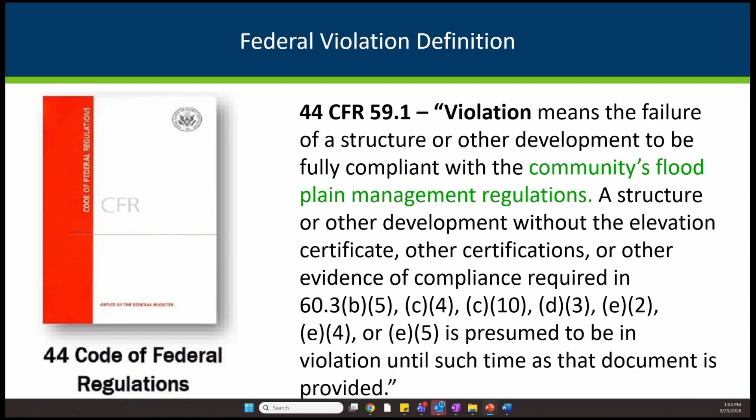And a reminder that sometimes folks think, well, as long as they're meeting the FEMA requirements, it's okay. But FEMA reminds us that communities, if they have higher standards, more restrictive standards, they are expected to enforce those rules that are in their ordinance. Your ordinance is the law in your community.

And there is wording in the Code of Federal Regulations here that if there are higher standards adopted by the state, and Minnesota has many higher standards, or your community, if you adopt things that are higher standards than our state minimums, whichever's more restrictive is what takes precedence. And that's, again, in the federal code. And there's another part in the federal code, I don't have that quoted here, but that the higher standards are encouraged in the federal standard.

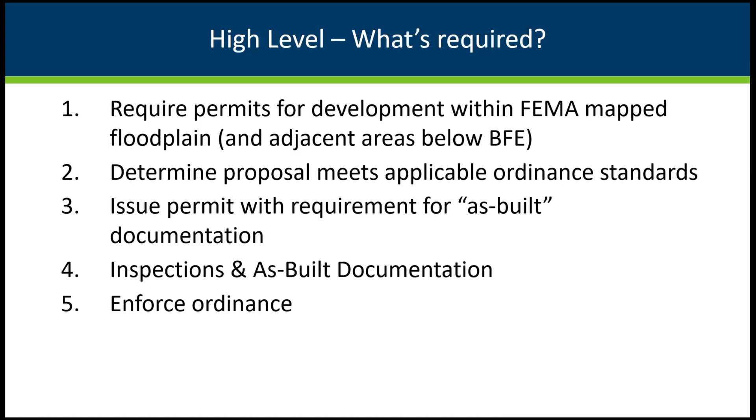So high level, what is required? That you're going to require permits for development in the FEMA mapped floodplain and in adjacent areas that are below the base flood elevation, the 100-year floodplain. You're going to determine whether that proposal meets your ordinance standards. You're going to issue a permit with a requirement that as-built documentation is submitted. You'll do appropriate inspections and get that as-built documentation, and you'll enforce your ordinance. And that's part of what communities agreed to when they get enrolled in the National Flood Insurance Program.

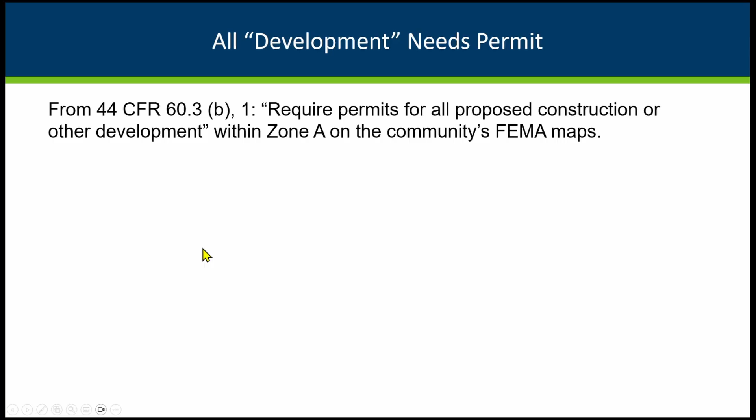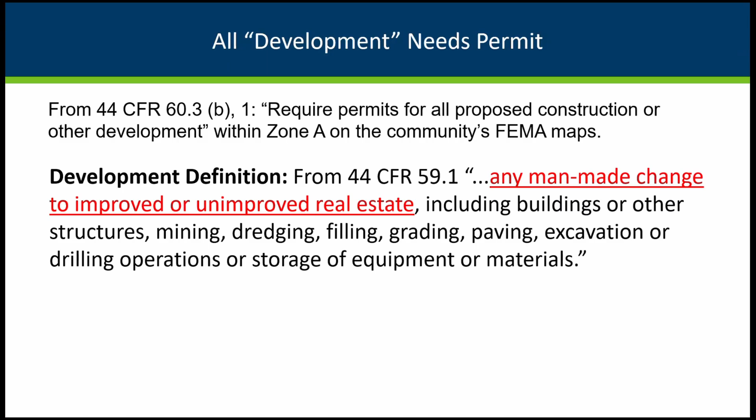So what development needs a permit? That, again, comes right from the federal code. It says that we must require permits for all proposed construction or other development within the Zone A. So any of the 1% annual chance floodplains or the 100-year floodplain. And the definition of development is very broad. It goes beyond buildings and main roadway crossings and those kinds of things. It's any man-made change to the improved or unimproved real estate. So in addition to buildings, that includes other types of structures, mining, dredging, filling, grading, paving, all kinds of different things. Basically any change to the cross section in that floodplain.

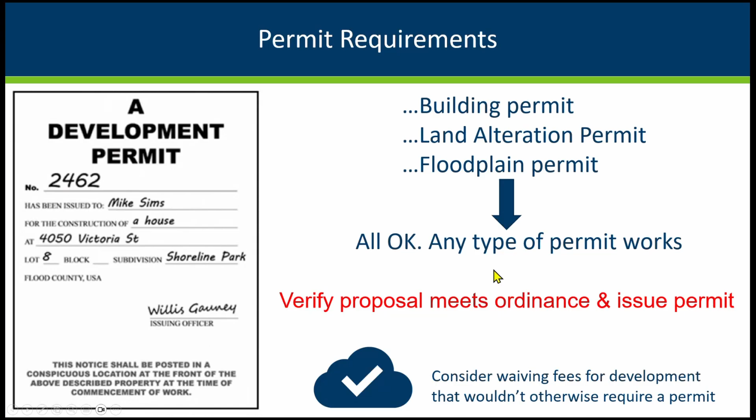And when we talk about permits, if it's a building and you have building code, then you're going to issue a building permit. But if it's not something where you would issue a building permit, you might call it a zoning permit or land alteration permit or floodplain permit, and any of those work. One thing that some communities might do is consider waiving fees or having reduced fees if it's something that wouldn't have required a permit normally. After they submit that permit application, you're going to verify that proposal meets the ordinance, and then you're going to issue that permit. And we do need to require as-built documentation.

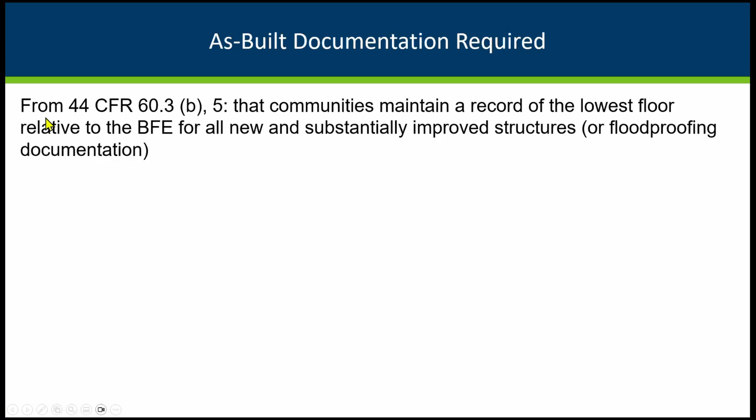And here's the reference in the federal code where it says that communities must maintain a record of that lowest floor and any flood proofing. So that's in federal code, and they emphasize in their trainings that those records must be retained indefinitely. We basically say, as long as that building exists, you should be keeping that on file. And unfortunately, we have come across communities where they cleaned house, they got rid of anything that was older than 5 years.

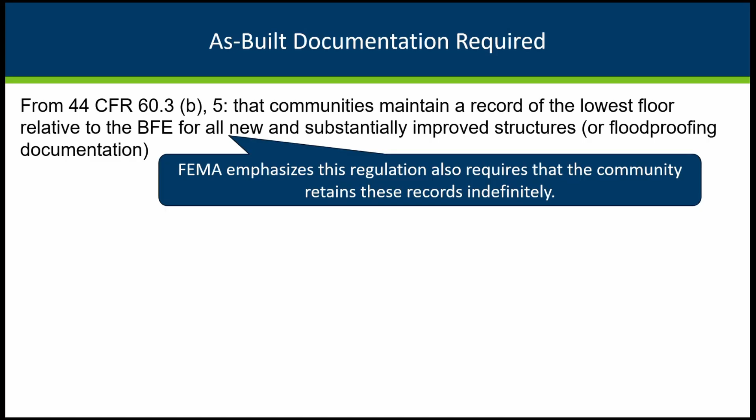And you do need to hang on to these things. Our buildings last for 50, 60, 70, even 100 years. So we want to retain those records. In the state rules, we have similar language that you must have that documentation.

But we'll mention later that there are times when if they're applying for a way to get their FEMA zone changed, or if they need an official FEMA elevation certificate, then they do have to have it signed by that licensed land surveyor or the professional engineer. And our more flexible wording that's in state law won't work in those situations.

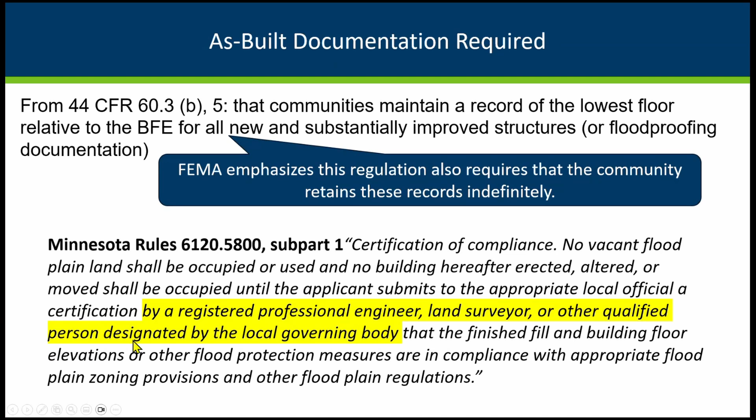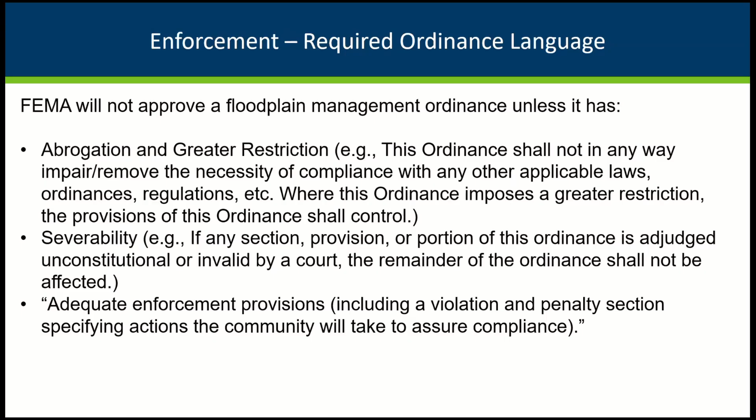We've got the wording in our model ordinance, and when we provide the sample ordinances, we have that included in what communities are adopting. They also want to make sure that you do have the enforcement provisions in your ordinance. And again, we'll have that in our sample ordinance, but sometimes communities, when they are just picking parts of the model and trying to insert it into their existing ordinance, those are things we have to make sure are in there, particularly when you're not adopting our whole model ordinance.

The ordinance in Minnesota law has to be properly adopted. DNR is required to review and give you final approval and verify that your ordinance meets state and federal requirements. But in order to properly adopt, we've got these rules in Minnesota statutes that you need to have at least a 10-day notice in your local newspaper, and at the same time you're sending that notice to DNR and many others. We do prefer it be sent electronically. The language in old ordinances will say you send it to the commissioner, and we prefer it not be mailed to our DNR commissioner or even to us, because that does delay things.

Our state requires that we have our public hearing, and DNR tries to give conditional approval before you have that public hearing. We like to get your draft ordinance so we can do the review and make sure that any required language gets in there before your hearing. Then you have your adoption. We'll be looking for that notice in the paper afterwards. You're required by statute to either run the whole ordinance in the paper, or do a summary notice, and usually communities prefer the summary because it's cheaper. Then DNR gives the final approval and we share it with FEMA, and they do a separate review.

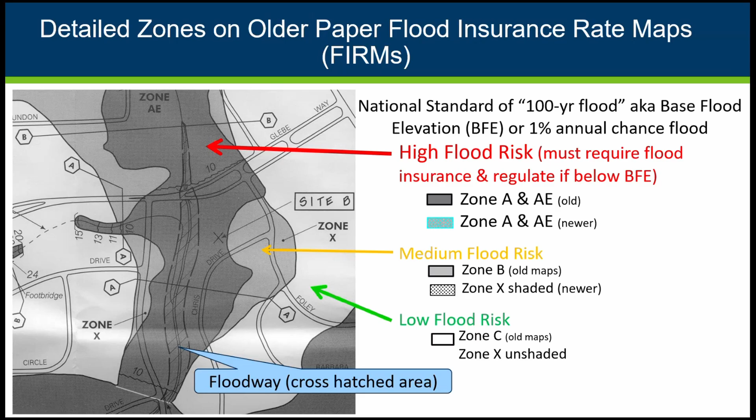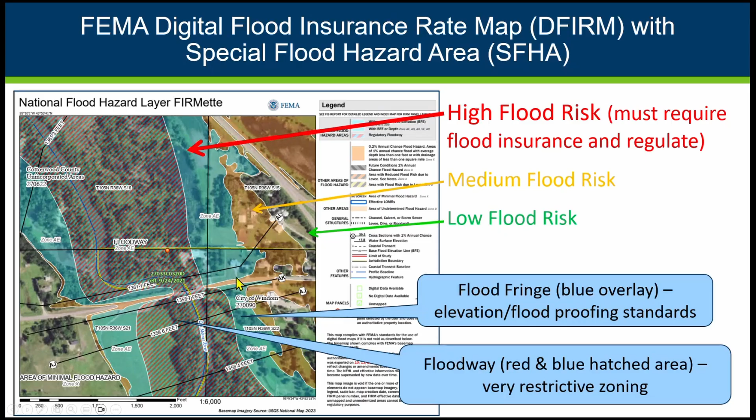There's that flood fringe label. On the newer maps, this is the coloring you'll see: the floodway, that red and blue hatching, and the light blue for the flood fringe. That medium risk area, which is usually the 500-year, will be this orangish brown color. And again, we regulate the floodway much more stringently, and the flood fringe will have our standards that we talk about.

When there is a detailed study, FEMA will have calculated other frequencies. They may have calculated the 10-year, the 50-year, 100-year, and 500-year, or in newer counties, they're also calculating the 25-year and something called the 100-year plus. Our minimum regulated area is that 100-year or the 1% annual chance floodplain. And again, some communities do regulate in the 500-year. And based on what we're hearing about possible future regulations, it appears that we'd be looking at regulating within the 500-year floodplain if that is mapped.

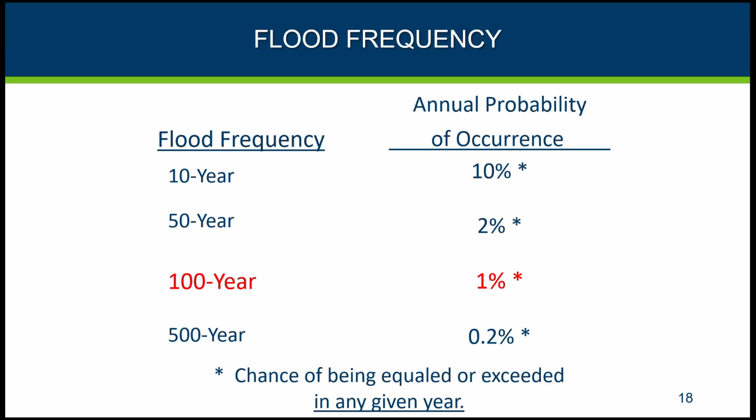If you've heard our presentations on the ASCE 24-24, that's a document that the building code folks use, and we're being encouraged to get the word out about it and encourage communities to adopt some higher standards based on that ASCE 24-24. And we did have a separate presentation about that in one of our monthly LGU forums, and we do have that recording available on our website.

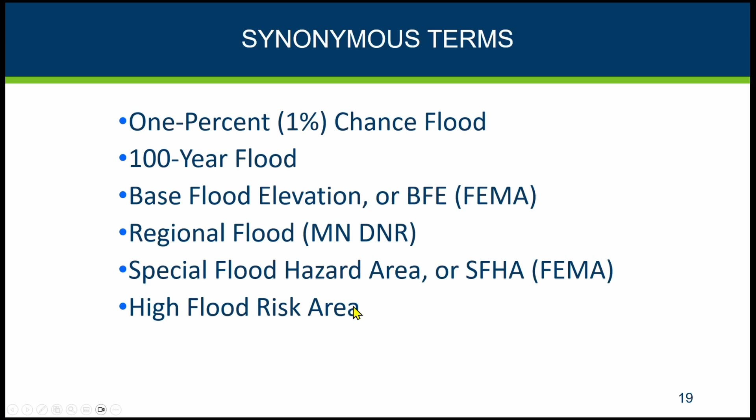The terminology that we're using, and I've already been using a lot of these terms: that 1% annual chance flood, the 100-year flood, base flood elevation is something FEMA will use when we're talking about minimum requirements. In state law, we refer to the regional flood. And if we're talking with insurance agents or lenders, they'll be calling it the special flood hazard area. And basically, these all mean the same thing, that 100-year floodplain, or that high flood risk area that we're regulating.

FEMA requires that any of the FEMA mapped areas are regulated by your ordinance. The way your ordinance is set up, it says this ordinance applies to all these mapped areas. And then we also have some state law that says the area adjacent to the FEMA mapped areas, if it's below the flood elevation, is also regulated by your ordinance. So for instance, this site here, we can see from the elevation contours, is actually a high site. So officially you're still regulating that because it's in the FEMA mapped area. But in this example, they could still put a basement and be meeting minimum elevations because they're so high.

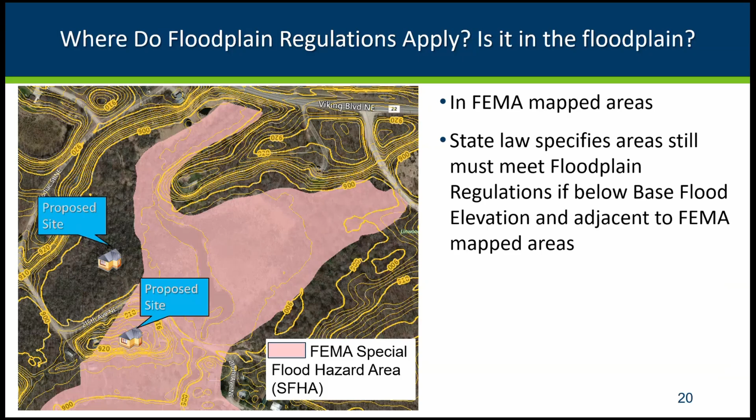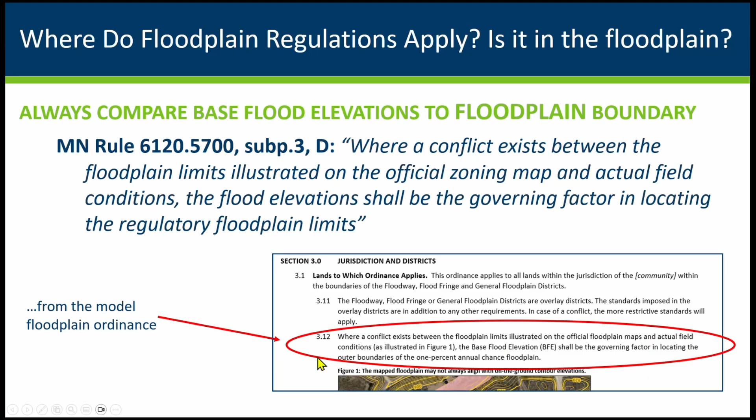But our state law recognized that, like in this example, the FEMA boundaries were not perfect. And many of our counties, unfortunately, still do have floodplain boundaries that do not match the actual ground elevations very well. Over time, this won't be a big deal because our floodplain boundaries will be following the contours better. But for now, keep that in mind if you're in one of those counties. And the language in our sample ordinance is here in section 3, and it talks about where there's that conflict, that you will regulate that area that's below the base flood elevation adjacent to the mapped floodplain.

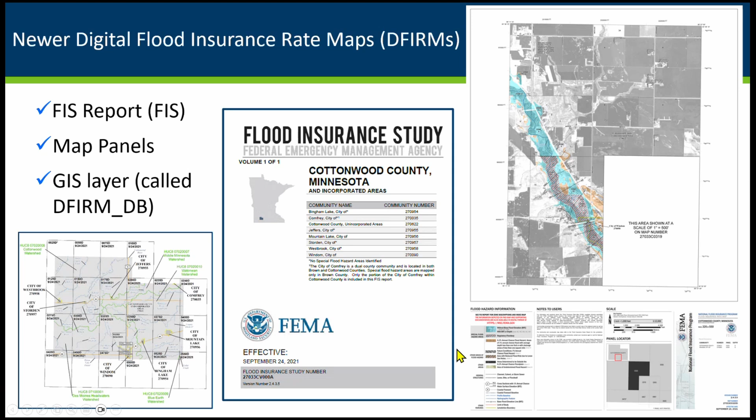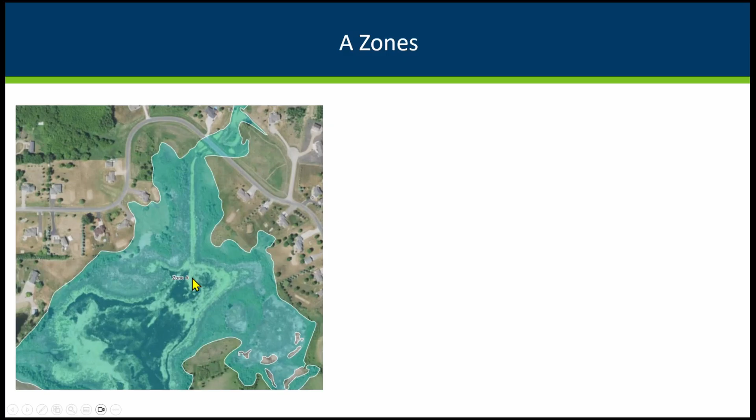The newer ones will have a color digital background or aerial photo background. Some of the first earlier new ones had more of a black and white aerial background. And those were showing some of the detailed study areas, but much of the state, we don't have detailed studies. We have zone A, where it's showing that 100-year floodplain, that 1% annual chance floodplain, but there's no elevations on the FEMA maps.

We do have supporting mapping, modeling, and we've got our cross sections in our DNR viewer, our lake and flood elevations online. And then we do have the 1% elevations on those lines. So we figured out which district it's in. Either it's going to be the floodway district, the flood fringe district, if it's detailed study, or in your ordinance, we referred to the areas with A zones as the general floodplain. That's also the district in some cases that will have detailed studies that don't have a floodway identified, and you'll be looking in your general floodplain area in your ordinance.

You're going to look at your ordinance, see what standards apply for the proposal that they've got, and do the review. And we do have two forms of a possible application form. You don't have to use this, but we do make this available as a Word document. So you can either use the full version that we've got as a recommended permit application, or you can put your name on it and take the parts that are helpful for your community and add what other local requirements you have. But we do have links to both versions. This is the simplified version that you would use if they're doing maybe decks or fences or tanks or just earth moving of some kind. And then we do have the building version that gets into more details that you need to look at if they're putting in a building.

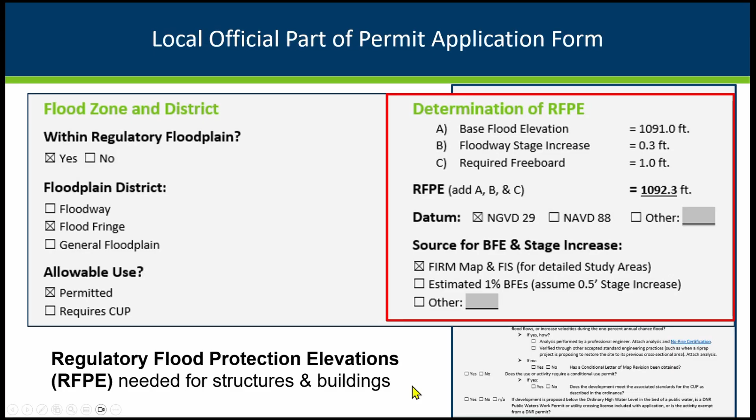And if you've got older maps, it's going to be in the NGVD 29 datum. If you've got newer maps, the information will be in the newer NAVD 1988 datum. Sometimes you have local datum. So it's important that you're noting what datum you're working in, especially if you're up in the northwest part of the state where that can be over a foot different. And a place to note, where did you get the information from? Was it from that flood insurance rate map and the flood insurance study? Was it based on maybe our supporting 1% annual chance flood cross sections that we have on our lake and flood elevations online site, or some other source, like maybe you reached out to DNR or got a Corps of Engineers study or something like that? But we especially need to know that flood protection elevation for structures and buildings, knowing that minimum floor elevation and how high floodproofing needs to go if it's something that can be floodproofed.

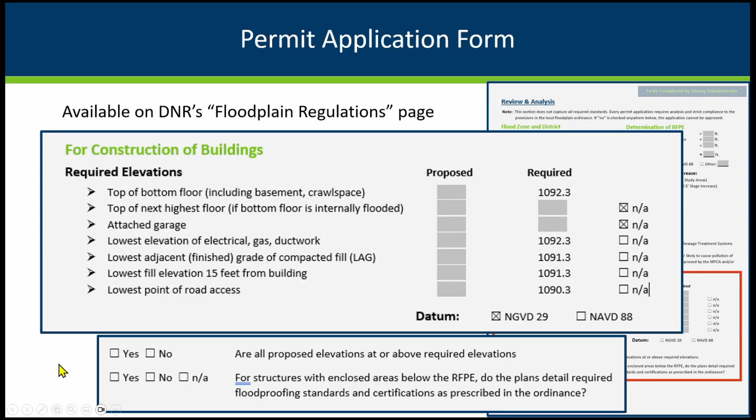Again, on that sample form that we've got on our website, we have a place to note what are the required elevations according to your ordinance, and then look at what are they proposing. And again, making sure that you're talking apples and apples, that if you've got the requirements here in 29 datum, make sure that you're looking at what the 29 datum would be for what your proposed elevations are. And we've also got a spot to note, are they all at or above the required elevations, yes or no? Or if it's something that you're looking at floodproofing, is it showing that the floodproofing is occurring in the area it needs to? So we're trying to step through making sure that their application is meeting your ordinance. Trying to avoid problems from the beginning is the best way to be enforcing your ordinance and making sure that they're following the rules.

We do allow those small accessory structures to be wet flood proofed. And in our most recent sample ordinance, we say that's up to 600 square feet, because FEMA came out with some accessory and ag structure guidance a few years ago and said that we can use up to 600 square feet.

Our older model ordinance and many of your ordinances use 576 square feet, a 24 by 24 building. Or if you have a really old ordinance, you might just have 500 square feet in there. But that allows flood-resistant materials, elevated utilities. It's got to be properly anchored, and it does require the flood openings that are within a foot of the ground.

Ceil, if I can interrupt, we did have a question in the chat if we have time. They're basically just asking about roads and sidewalks, whether or not they need to be elevated to the base flood elevation. Sure. Roads and sidewalks. Well, sidewalks, we don't have anything that specifically talks about that. The roads gets a little more complicated because it depends on if it's a major road.

We've got wording in our subdivision language and in the public utilities and road section of the ordinance, like a main highway, a main collector road. It does need to be elevated. Let's see, help me remember, Gary. I believe it's to the RFPE. For major transportation routes.

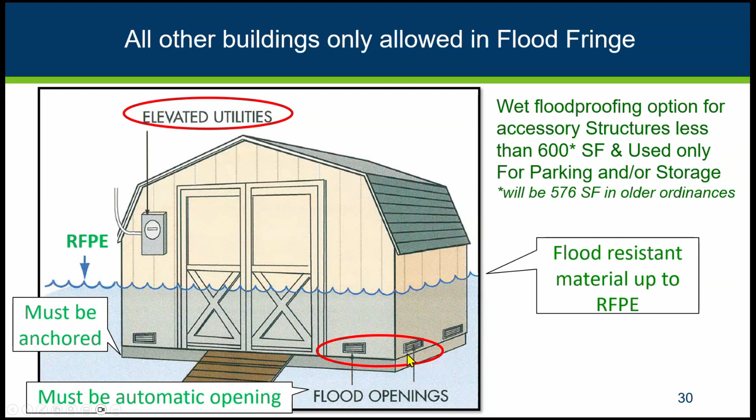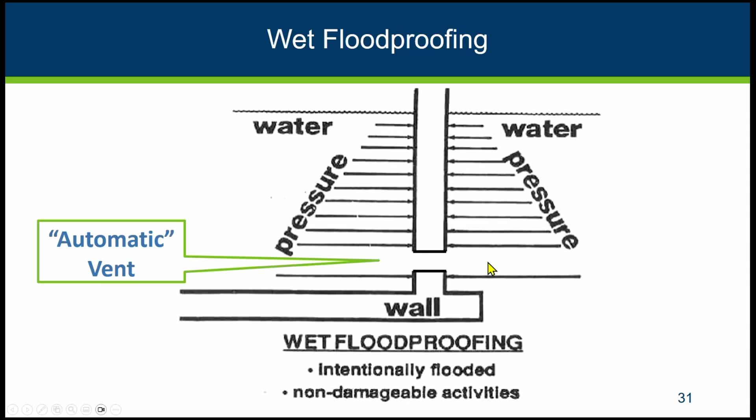Oh, back to this, talking about these flood openings. And the requirement is that those are no more than a foot above the ground or a foot above the floor of the building. And the idea there is to allow the equalizing of the water so that you don't get water building up on the outside of a wall, that if you have the opening, then the pressure is coming from both sides, and that will be more stable. If you don't have openings, you get the blowouts.

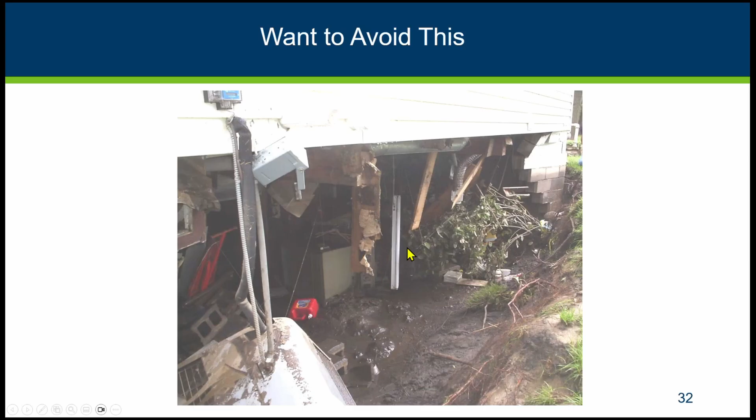And this is a picture that we had many pictures like this in like the 1997 flood and other big floods, where there were a lot of older buildings where we had basements or crawl spaces, and the water built up and put a lot of pressure on that building, and it wasn't designed for water to be up against that foundation.

Within a foot of the ground or the floor, if the floor is a little higher, and for every square foot that's enclosed, you need a square inch of net opening. So if we have our 600 square foot garage, then we need 600 square inches of opening there. And this is one of those enforcement things, is making sure that that is automatically opening, that they're not covering these up. And if you're out inspecting, verifying that that is a functioning opening, that they have that there.

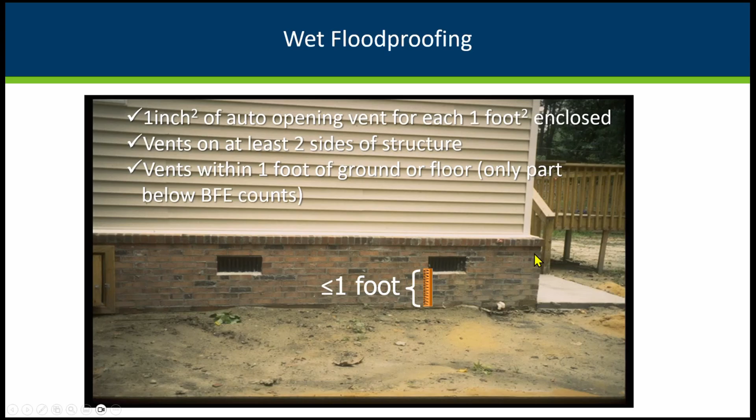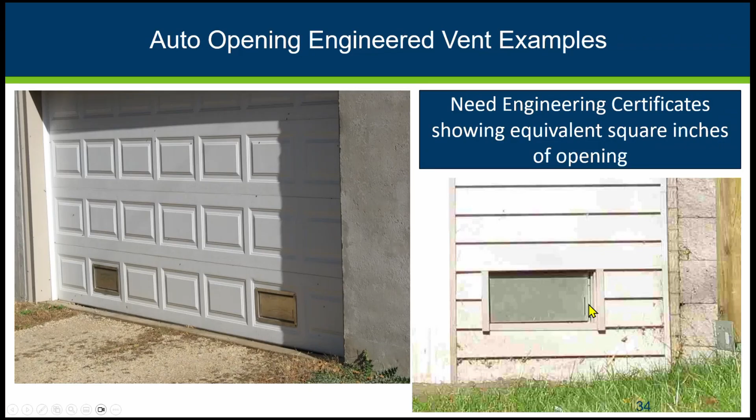And they need to be on at least two sides of the structure, especially in areas with any kind of flow. That requirement is because you could have this get blocked on one side, and we want at least one side where the flow would still be able to go in and out of the building. Here's some automatic openings that have been engineered, and those are nice ones, especially if you want insulated areas. And they've got a certification with them saying this particular model is the equivalent of 200 square inches or 215 square inches or 225 square inches are some typical certifications you'll see.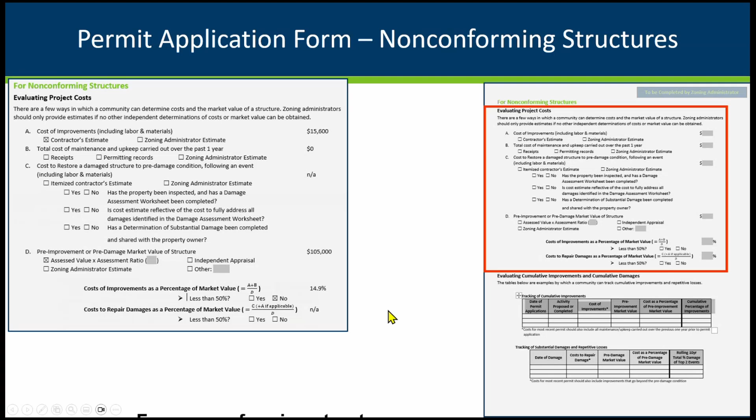If you do have an existing non-conforming structure, those do get more complicated. So we do have some areas in our sample permit application to look at those non-conforming structures. And we have to look at the cost of that proposed improvement or repair, what is that cost that we would expect it to be based on like a contractor's estimate or other estimates that take the full cost, not saying I'm going to do this myself, but looking at what it would cost a contractor to do.

Look at that compared to the market value of the building by itself, not including the land value. And if it's more than 50%, then it is substantial improvement, and they need to bring it into compliance. So if they're trying to do it and not bring the whole building into compliance, they have to stay under that 50%.

And we do have a separate training that we gave recently on substantial damage determinations and your role after a flood. And we get into some more detail on the substantial damage determinations. And we talk a little bit about cumulative improvement. But here, the minimum requirement is that you're looking at the improvements that they're proposing right now, and then any recent repairs and maintenance. And in our model ordinance, we use a 365-day look back, because sometimes it's not clear when a project started and when it ended.

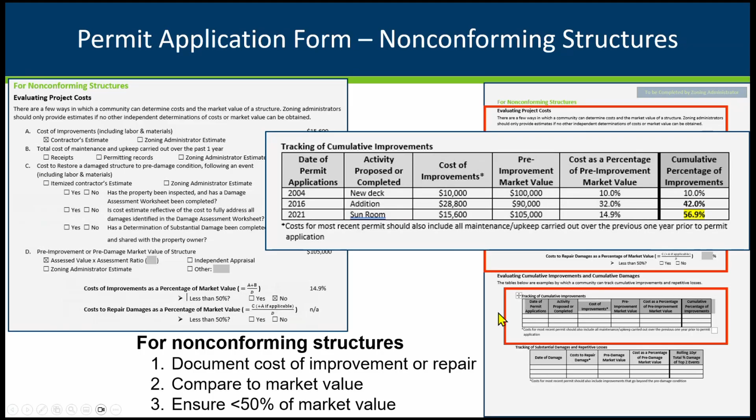So the minimum requirement is that you're looking at the proposed improvement now and any maintenance and repairs done within the previous year. Some communities do have a cumulative improvement requirement in your ordinance. And so there, it might be from the date of your first ordinance. I think we're starting to see more interest in maybe a 10-year rolling or 20-year rolling, but you'd look at any of the improvements over time. And we do have a place to do those calculations in our model application form.

And I mentioned the substantial damage that we just gave a training on more recently. Reminder that we do have our post-flood substantial damage playbook for local officials. And this really steps through a lot of the details you would need to know for determining if something's been substantially damaged. But just at a very high level, substantial damage can occur from flooding, from any kind of event, fire, tornadoes. If it impacts a building in your mapped floodplain, you're looking at whether it was substantially damaged. And if it was, then they need to be brought into compliance with that current ordinance and elevate, maybe fill in a basement, those kinds of things.

And if you do have a big event, then you'll be looking at bigger permitting and the efforts to do the substantial damage determinations. DNR will help as much as we can, and in bigger events, traditionally FEMA's been able to come in and help with some of these determinations. And depending on if there's a federal declaration or not, sometimes there's funding available to help pay to bring on extra help in doing those determinations and the permitting after a flood or other events.

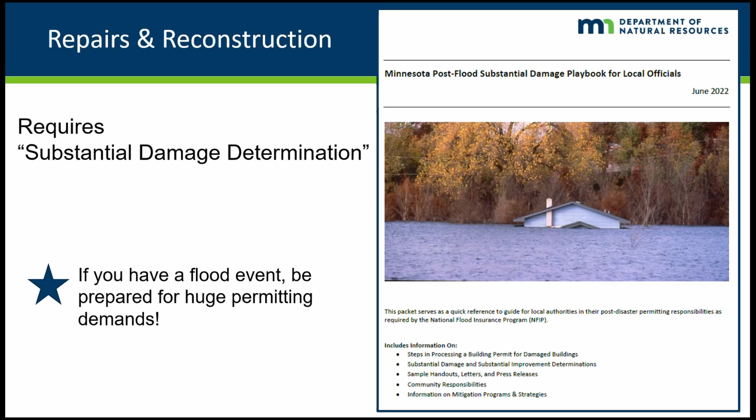A reminder that if something is happening in the floodway, they can't put buildings there, but if they're doing like a road crossing or grading for a trail or grading for a driveway or a parking lot or something like that, if it's going through a floodway, they must get a certification of no rise, show that that filling will not obstruct the flow, will not cause an increase in flood elevations for anybody else. And that normally is completed by an engineer. Sometimes we can satisfy that with some other engineering practices.

For example, if we can find proof of what the previous grade was and maybe it was eroded and they're just showing that they're going back to what was there before, then we've got the form, and we're actually working on a new version of this form. We realized that we put that out there in 2004, and we're going to have a fillable PDF and a little bit more user-friendly form to fill out here in the near future. But if they can't show that, if it will cause an increase, they've got to go through FEMA's conditional letter of map revision process. And that is not an easy process, and people will want to avoid that.

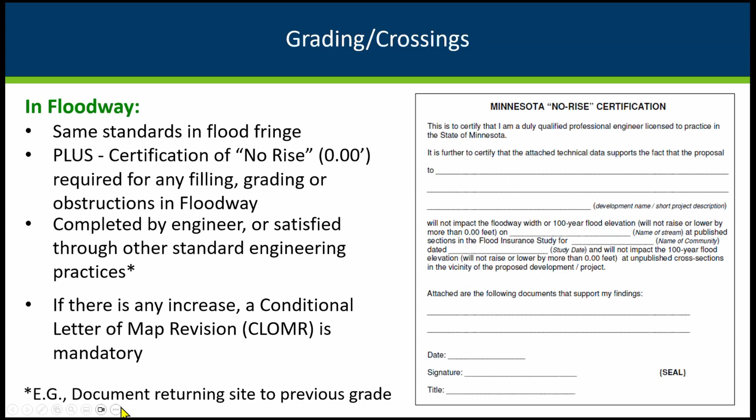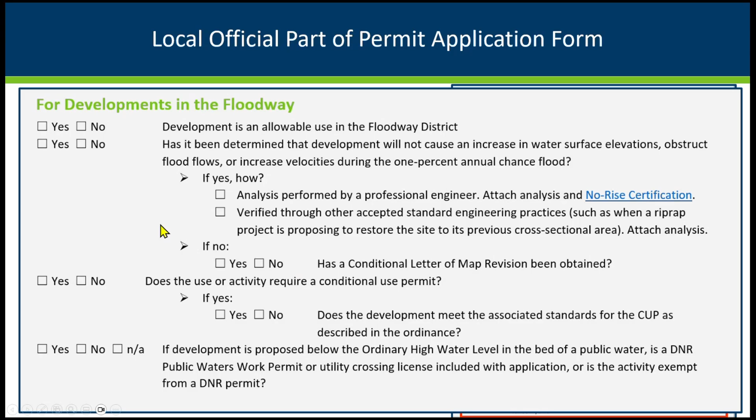So we do have a place on our form to look at the developments in the floodway, and is it a type of development that's allowed there? And yeah, if it's a road or grading for something like that, that is allowed. But if it's a building, no, it's not going to be allowed. And then how did they determine that it meets that no rise requirement? Was it done with an analysis by a professional engineer, or was it one of the other accepted engineering practices that we can use?

So we try and step through the things that you need to remember in going through that review. And then at the end of our sample application form, we've got a place to note that it was approved, we'll have to have a conditional use permit hearing, we need some additional information, or it's a flat out, we can't accept this. They're asking to put a building in a floodway, and we can't allow that.

Oh, and for developments in the general floodplain where we don't have a floodway, we have the allowable rise that needs to be documented. So similar, and that's another form we're going to have in the near future here, an allowable rise form. But whether that was done by a professional engineer or we use one of the other methods that we can use to determine if it's in the floodway or flood fringe. And an example would be if it's adjacent to a lake that's not a flowing system, if it's above the ordinary high, we usually say that can be treated as flood fringe, just based on it being above that ordinary high.

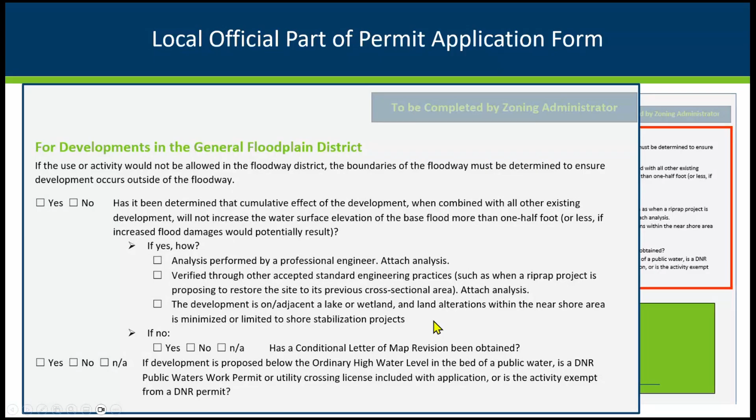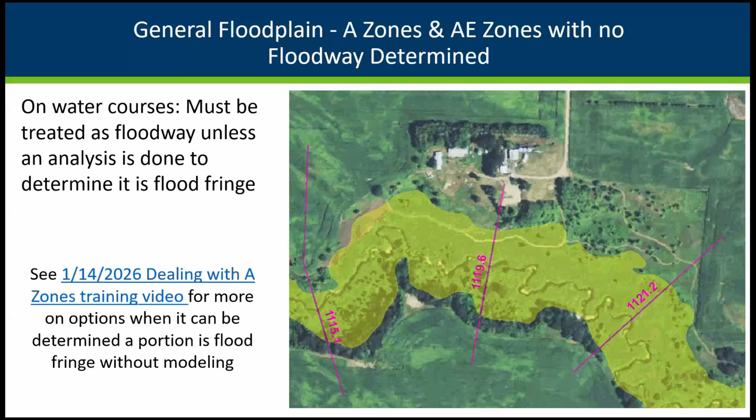And we do get into more details on determining that allowable rise in our training that we did earlier this year, dealing with A zones, and some of the other techniques that you can use to determine whether it's floodway or flood fringe without them having to do modeling and have that engineer do that updated modeling. We do talk about that in our Minnesota Quick Guide, and I think we'll have a link to that at the end of the training here today.

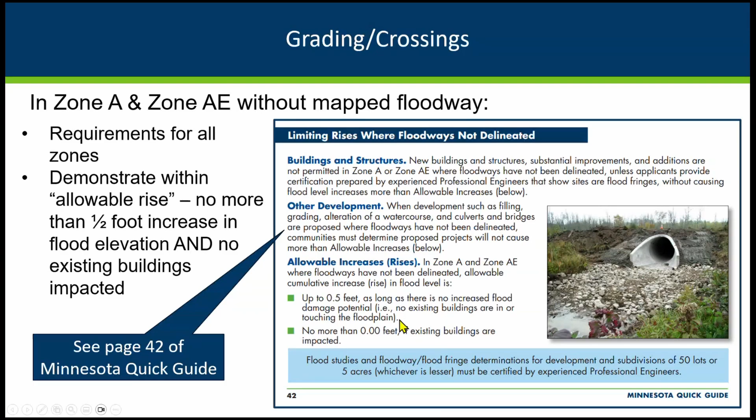But talking about that, they do need to figure out if they're in a floodway, flood fringe, and the allowable rise is what we call that analysis. If it's not a detailed study, we still need to make sure that any rise that is caused is less than half a foot. And if there's any existing buildings, you need to make sure any increase doesn't touch those existing buildings. And if there are existing buildings right next to the floodplain, they can't cause a rise.

Reminder of the community's responsibility after you look at new permitted activities and making sure they're following the rules. That's your best line to make sure that you're following your ordinance, you don't have violations.

The next most common situation we see is people have applied for what's called a letter of map revision based on fill. If the building is in or touching a floodplain and someone has a federally backed loan, that lender must require that person to get flood insurance. And if they're on a naturally high area, they can apply for a letter of map amendment, and they get a mandatory flood insurance waiver, or they can bring in fill, elevate that building, meeting your ordinance, and then apply to FEMA for that letter of map revision based on fill. So it's another way to get the insurance waiver from that mandatory flood insurance requirement.

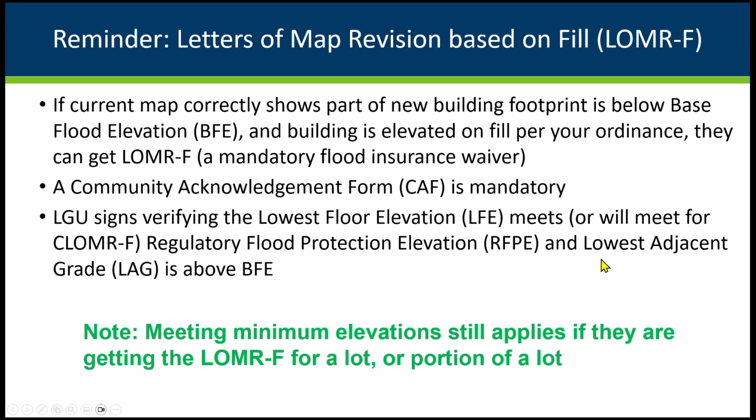But when there's fill involved, they have to have a community acknowledgement form that's filled out by you at the community level. And when you're signing that, you're verifying their lowest floor will meet the regulatory flood protection elevation in your ordinance, or if it's a proposed building, that it's proposed to meet that minimum elevation, and that the lowest adjacent grade is at the base flood elevation or above.

I can try to take over. And Ceil, please help me out if I miss something here.

So letters of map revision based on fill. So these are those situations where you've got a property that typically would be below that base flood elevation, but they're going to bring in some fill. They're going to elevate to the BFE to meet the federal requirement. In many cases, they're going to elevate to that regulatory flood protection elevation to meet the state requirement, and then they're going to build their home.

So as this slide says, and I've encountered a number of these, LOMR-Fs are common violations. Oftentimes, what I've identified is they'll meet the federal requirement. They'll elevate to the base flood elevation, but they aren't necessarily bringing the top of the lowest floor to meet the state requirement, which is that regulatory flood protection elevation.

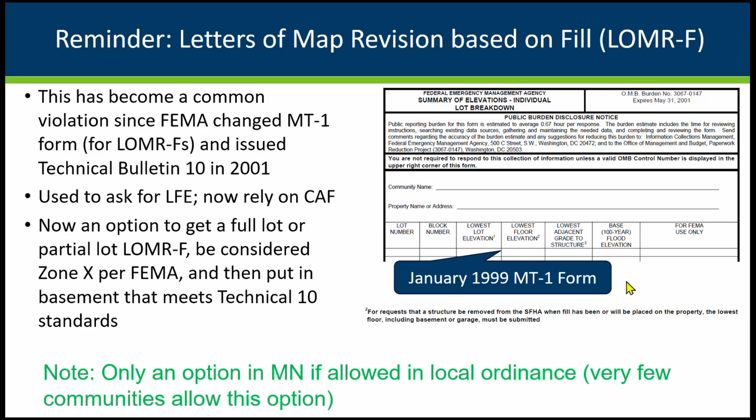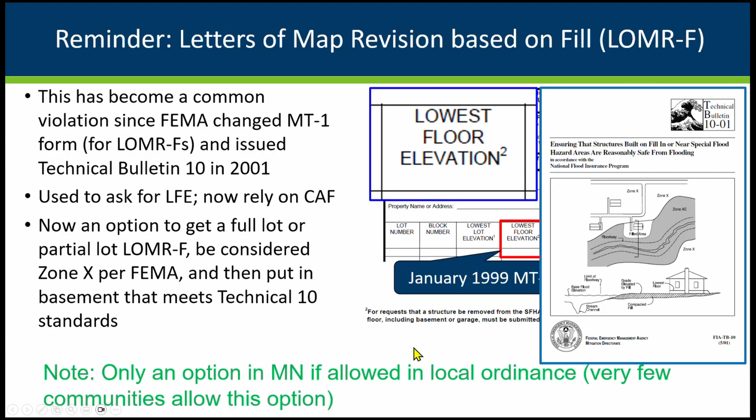Yeah, sorry there, Gary. But the other point that I was trying to make in that slide is that it used to ask for the lowest floor elevation in the old form. And then that got changed in 2001 when they came out with this Technical Bulletin 10-01. And then they started allowing some alternative elevation methods where they could fill if they met this Technical Bulletin 10 standard. But that's when they started requiring the community acknowledgement form to be filled out when there's filling.

And when you're signing that, you're making sure that they are not in the floodway, have all the necessary permits or will get them, and that it has to be reasonably safe from flooding. And what that means is that it either is meeting your ordinance and meeting that minimum elevation, or it's meeting some specific requirements in Technical Bulletin 10.

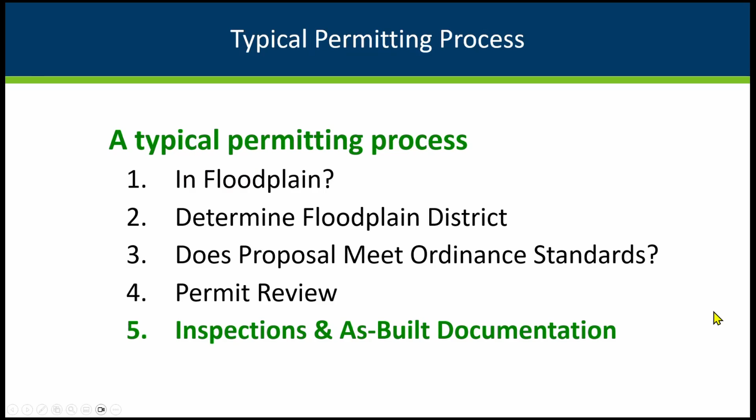So moving on, talking about inspections and as-built documentation here. One of the best ways to document that is with an elevation certificate, the FEMA elevation certificate. And if you're in a community rating system, you must use that. And if they want to use it to get a little cheaper flood insurance premium, they have to use the elevation certificate. We do have this sample elevation as-built that includes some of the state requirements that aren't in the FEMA requirements, like this lowest fill going out 15 feet from the building.

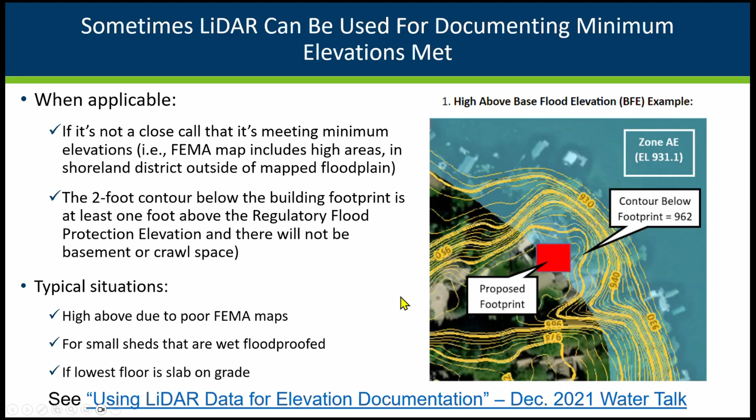So what's a violation? Not getting a permit, and the typical reaction after would be the LGU realizes that they did something. Maybe your assessor's office advised you that there's a building there that wasn't there before. And then you're going to look at an after the fact permit. You're typically going to charge a higher fee, but you're seeing if they had come through the process, would they be meeting your ordinance, or do they need to change something after the fact?

And if work started without a permit, you're normally going to advise them to stop. And if they don't listen to your verbal request to stop, you issue that formal stop work order. And if they're not building in compliance with the permit, again, advising them to correct, and you might need to go through that formal stop work order. And if you've got building code, then you can be withholding the certificate of occupancy. Same thing if they don't submit as-built documentation, you can be withholding that certificate of occupancy if you've got building code, or escrow.

And that's something that I know some of our counties that don't have building code, or cities that don't have building code, they collect an escrow up front that will basically cover what the cost would be for the community to hire a local surveyor to go out there and get that survey. So then once they've submitted that as-built survey, they get their escrow back. If you don't do that now, we could point you toward a couple communities that do that, if you want to be able to talk with a fellow community and see how that works.

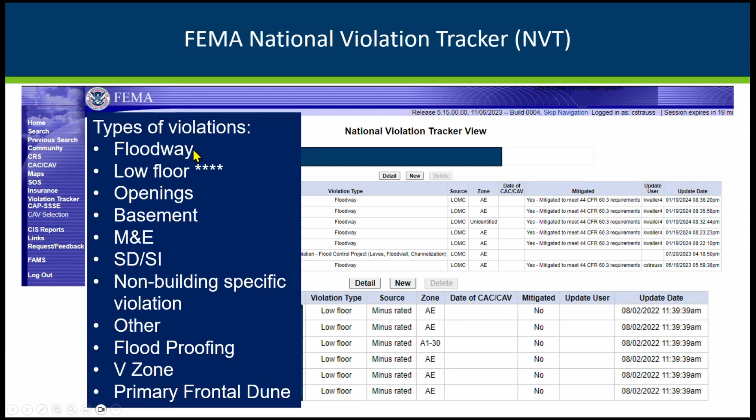So it'll say the kind of violation it is, whether it's been mitigated or not, and the typical kinds of violations that they list in here. Well, these are the ones that they list. The most common that we see in here is low floors, but also fill in the floodway where there wasn't proof of them meeting that allowable rise or the no rise requirements. So for CRS communities in particular, this is a concern because if they're in this database, in this National Violation Tracker, that feeds a system that says they cannot get the insurance discount that community rating system communities get.

So I saw City of Austin was on the call here today. They're a class 5, so people get a 25% discount on their flood insurance policies in Austin and in Moorhead and some other communities that are in that community rating system. So if they are shown as having a violation, they don't get that discount. One problem was that they weren't telling people why they weren't getting the discount for a while, but I think that that's been improved in the FEMA process now.

So here's what the form looks like, and there is a place for us to go in and say it's been mitigated, and the mitigation choices would be it's been mitigated to meet those federal requirements, or it's been mitigated to meet the higher state requirements. It's been mitigated to the maximum extent possible, which doesn't mean it was fully mitigated, or the building's not there, or we realize that it wasn't actually a violation. And there actually were quite a few in there that really weren't a violation. A variance has been issued, or it's just plain no, it hasn't been mitigated.